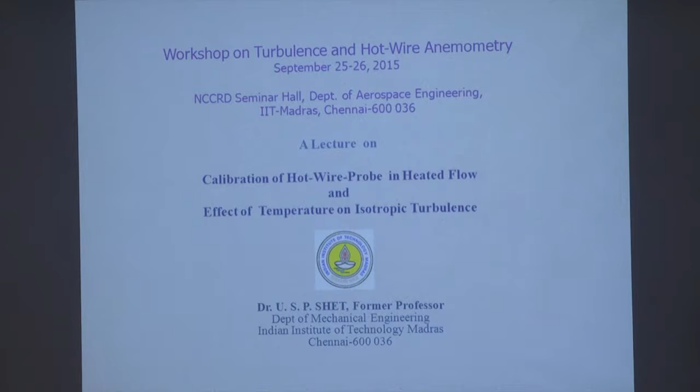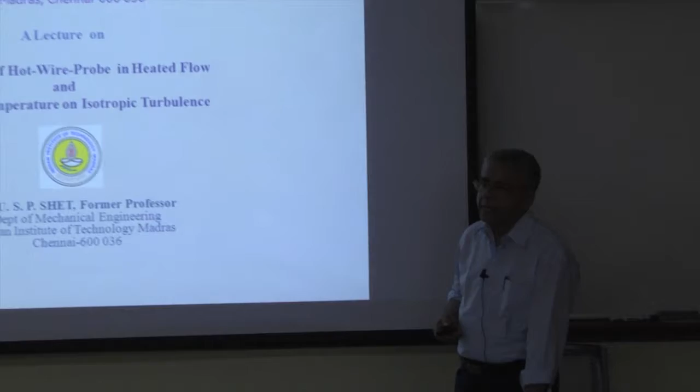I did work on hot wire anemometer towards my PhD work at Salford University, UK. Then on return here, I also guided two PhDs on turbulent combustion, and the research scholars had to do a lot of measurements. So it was with great pleasure that I accepted this invitation, and I'd be happy to share my experience with you on these measurements, and any doubts regarding the construction of the facilities towards the calibration of the hot wire anemometer.

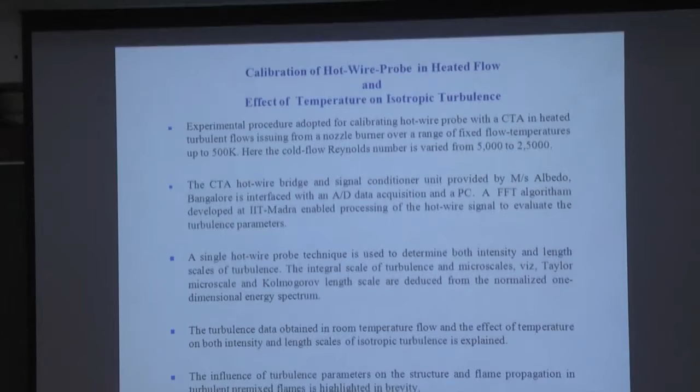Before I go into the topic, I will highlight how I intend covering this talk. First, I will talk about the general setup we used, and the CTA bridge that was constructed here. It was a custom built hot wire bridge with signal conditioner. In those days at IIT, everybody was using the hot wire anemometer. There was such a scarcity, we had to wait sometimes to borrow them from the neighboring lab, so we thought we can try this exercise. At that time, Professor TS had just come from Kanpur IIT, and he had an algorithm on FFT.

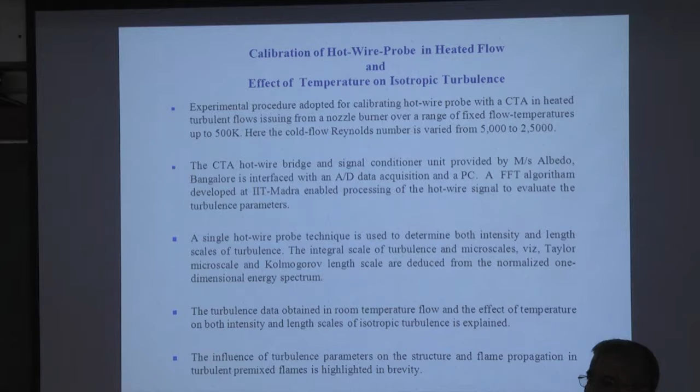You would have heard about that yesterday. He talked about how to handle the time series of the hot wire signal, then digitize that and carry out the statistical analysis - measuring the RMS value of the velocity fluctuations, and converting the time series to the frequency domain, leading to the construction of the spectral density, the energy spectra of these signals. That led me to use that bridge to deduce hot wire measurements and get data on time scales, length scales, and so on.

In fact, we tried to relate the signal - the result obtained from the signal analysis in the time domain, that is autocorrelation - and using Taylor's hypothesis, went from the time scale to the spatial scale, so the length scale could also be deduced from that. Another possibility is directly from the spectrum, since we have the facility to get the spectrum, and from the spectrum this length scale can be deduced.

With that motivation, we were very happy to try building a hot wire bridge as a trial unit, and then we compared the results with the Dantec hot wire anemometer, and the results were excellent. Cost-wise it was very effective - less than a lakh of rupees, whereas the commercial unit would cost about 6 to 8 times higher at that time.

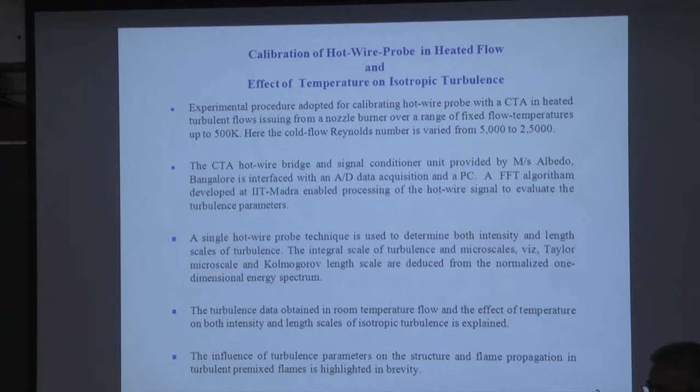So we wanted this turbulence data as a function of flow temperature, hence the interest in making the calibration in heated flow. Of course, it is a very difficult task to achieve steady state conditions and control the flow parameters such that you can vary the Reynolds number and then vary the temperature given the same Reynolds number. That exercise we had to do, and the measured data we obtained, the intensity of turbulence, the length scales of turbulence, and the spectral information as a function of temperature, we analyzed nicely, and that result I will present as the last but one item here.

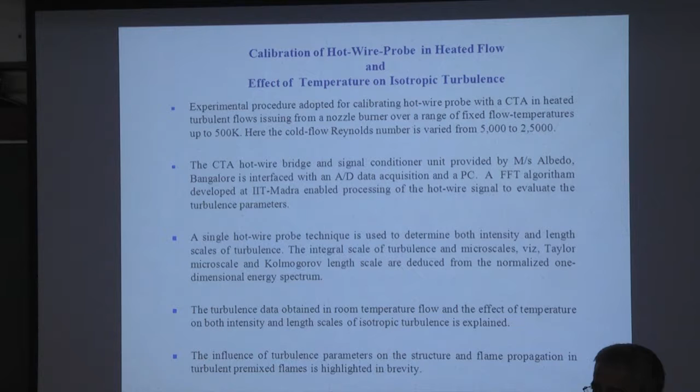Before I begin with these top four topics, I would like to show you some interesting Schlieren pictures of turbulent premixed flames, where you can really see the influence of turbulence on the flame structure. This gives a lot of information, so that our goal to deduce appropriate models for predicting the burning rate, the turbulent burning velocity, is guided by these flame pictures, which in short tell us what turbulence does to the flame, how it changes the structure.

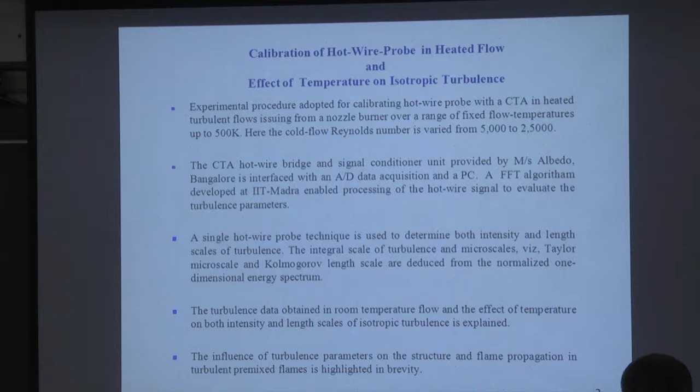So this is not part of the main lecture. In fact, I will just show you the pictures first and quickly move on to the main topic. Am I speaking very fast? It's just an introduction, and if you have any doubt you can stop me and I will explain further.

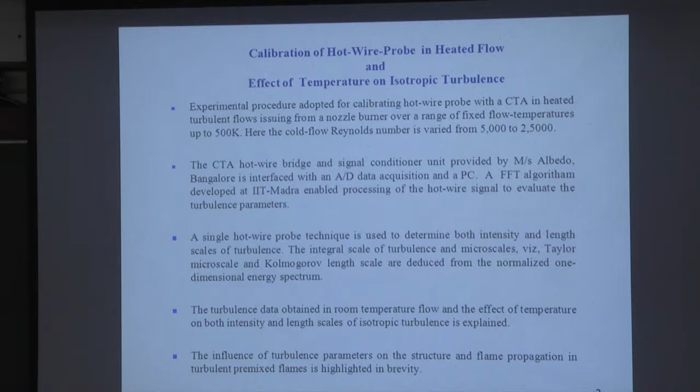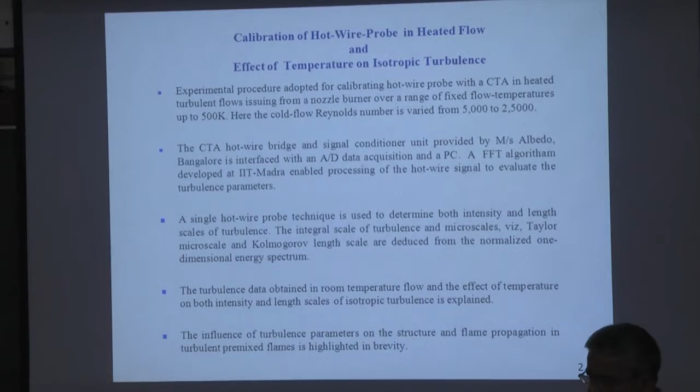With that motivation of having to measure the turbulence parameters accurately, we ventured to build a hotwire anemometer ourselves and obtain the results. This was also part of the PhD work of two scholars. Prior to his work, the other scholar worked with what was then called the DISA anemometer, which later became Dantec. So it went through a lot of changes. The results we obtained were comparable in accuracy to the commercial Dantec equipment available with us at IIT at that time, but everybody was interested in doing such measurements in fluid mechanics, aerospace, aeronautical, mechanical engineering, and so on. So now I will go to those flame pictures.

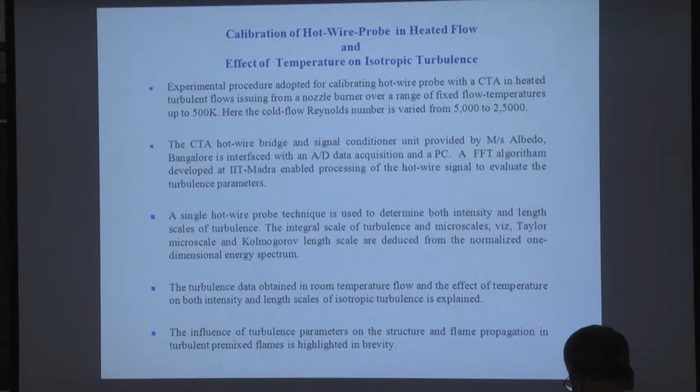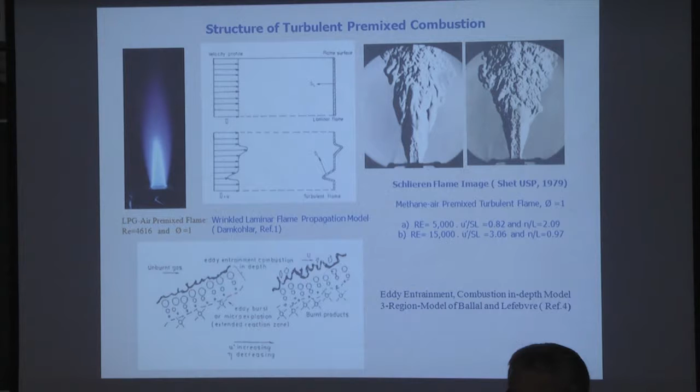This is just the structure of a flame. This is an ordinary turbulent premixed flame—you are very familiar with the Bunsen burner, no? If you try to adjust the flow rate going through the hole, there's a control, a small ring. If you try to close it completely, what happens? You get a diffusion flame, because only the gas jet comes from the bottom, and it simply comes out, no air can enter.

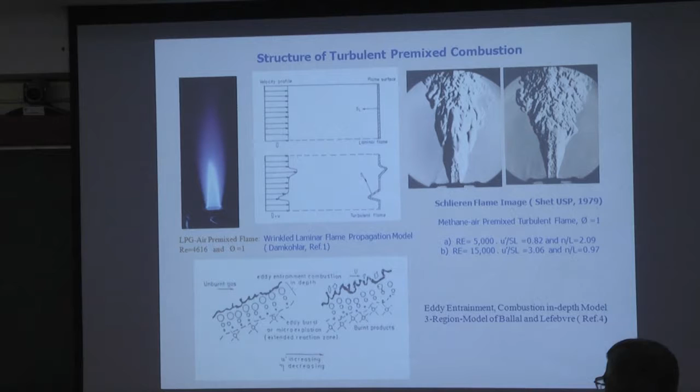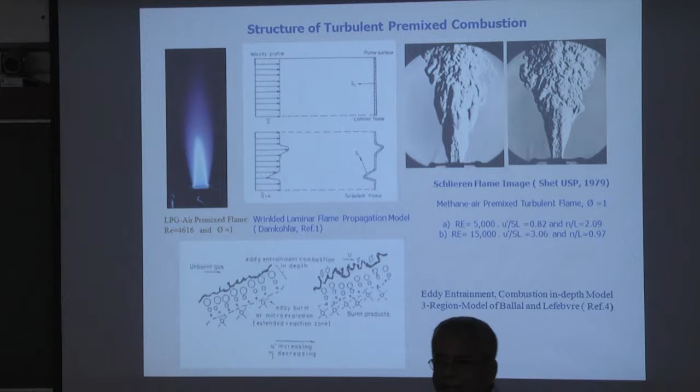As it emerges from the burner mouth, it enters air and you get a so-called diffusion flame. But if you allow air to enter the Bunsen burner by controlling the ring, you get a similar small flame, but this is a laboratory turbulent flame, LPG air flame, Reynolds number 4616, a stoichiometric flame actually. Here you see the so-called turbulent flame brush, which has a certain finite volume. In a laminar flame it is straight, you get a sharp, very flat flame surface. So turbulence does a lot of action on this flame surface. In fact, the flame-flow interaction is so complex, and turbulence does wonders on it.

It increases the burning rate. The flame becomes very compact, it becomes a high intensity flame. What is meant by high intensity flame? Energy released per unit volume. Of course it is a rate of energy release, but if it is done in a smaller volume, it becomes a high intensity flame. So turbulent flames are really more compact, and unlike diffusion flames which are very tall, they also serve other intended needs—they emit radiation, and their heat transfer properties are excellent if you want heat transfer from the flame to the surroundings. But premixed flames won't radiate heat as much; they intensely release heat being very compact, and that has its own application.

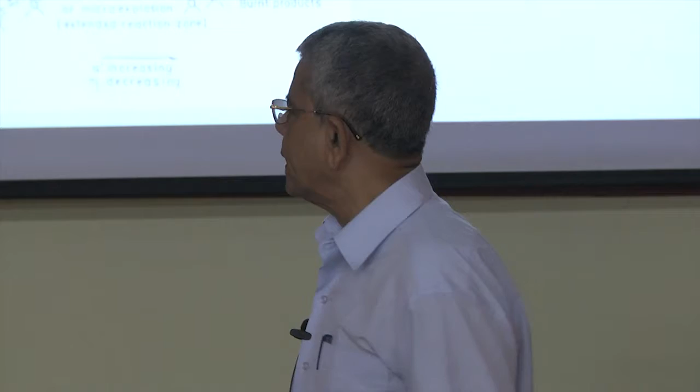So these are technical reasons why people go for premixing. There are dangers too, of course flashback, a lot of things. And if you go to extremely lean mixtures, you tend to save fuel, conservation is there, but it becomes unstable. Since the burning velocity for lean flames is smaller, it leads to instabilities. You would have heard in your aero department a lot of work on combustion instabilities—I think Professor Sujith is doing a lot of work in that direction.

So lean flame has other problems, like this. So now what is the role of this turbulence?

We have to understand this because we are measuring turbulence parameters, intensity of turbulence and length scales. As you know, turbulent flow is very complex in nature. It has U, V, W components, and it becomes isotropic because in each direction the fluctuations have no preference. It's random, yet at the same time it is reproducible.

Intermittency is there, and we have to characterize the flow with appropriate parameters. How to do that? You can give a statistical description, or go to the classical theory of mixing length, or Prandtl's mixing length theory. And after all, what is the mixing length?

Then you think about the eddies. You can say turbulent flow is nothing but a flow of fluctuating eddies of different sizes and different angular velocities. Eddies have a lot of meaning. They can fluctuate, they can spin, and there is vorticity in it. It's a very complicated picture.

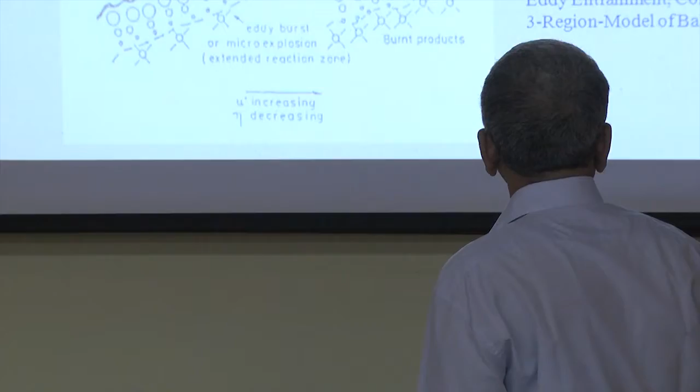See, this is a Schlieren flame image. I did this for my work long time ago. That was the work there. See, this is at 5000 Reynolds number, and this is at 15,000. It's 3 times more flow here.

Then you have this turbulence parameter. I measured the turbulence. Such a structure can be a flame, or it can be other situations like mixing.

At one point mixing takes place locally, and then the mixing intensity decreases as you go away from the source of turbulence, like this. In this case the overall structure is like this, but how will I relate the turbulence effect in this particular case?

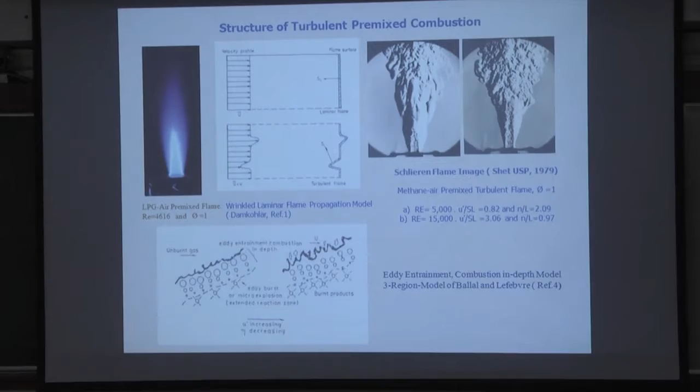So we generate turbulence at the burner mouth here, and then the flame forms this cone here. Fortunately for those who work in this area, the turbulence is preserved in the potential core - from outside, turbulence is not able to come inside, because there is a barrier against that. The reaction zone will not allow outside turbulence to come inside.

Inside, turbulence is there, that causes its action on the flame front. So the flame front gets wrinkled here. Wrinkled means the eddies will come and bombard the flame surface, they get undulations, and it becomes wrinkled.

That is characterized in this research by the parameter intensity of turbulence, u prime, the RMS value of velocity fluctuations. So we go for isotropic turbulence, simple case. I am sure at that plane of the burner mouth, whatever I have generated, I know it is well defined, it is isotropic, and further downstream there may be decay, that is always there.

Then the overall effect of that structure is to wrinkle the flame if turbulence is weak. When you say weak turbulence, I have to compare with something, a reference. The reference itself is that property called the burning velocity, laminar burning velocity.

How many of you are here in aerospace background? Aerospace here? Mechanical, all of you are mechanical, right. So you would learn all these things, burning velocity of premixed system.

Eta by L later on has great significance, the ratio of Kolmogorov scale to the macro scale. It talks about the dissipative nature of the flow. So if the size of the eddies is large in comparison to the thickness of the flame, delta L, it causes undulation on the flame surface. So this is large here.

So this is the story of the turbulence effect on the reaction, explained by several theories which we are not going to cover, like the wrinkled laminar flame theory. They are not of concern for this talk, but I elaborated this to show how important this length scale of turbulence is, which you are measuring, and later the magnitude of these scales has to be compared with the size of the flame front thickness.

So that ratio, 2.09, is very high, so it wrinkles there. The flame front thickness, delta, is very difficult to evaluate. By measurements you have to take a flame picture and define the boundary, one side unburnt, other side burnt. In laminar flames it is very easy, it is very bright and demarcated easily, whereas in diffused combustion it becomes very difficult.

Now, see the other case is very interesting. This is when U prime by SL is large, turbulence becomes stronger, and at the same time eta by delta L becomes less than 1, meaning eddy size is comparable to the flame thickness. That leads to the extended reaction zone.

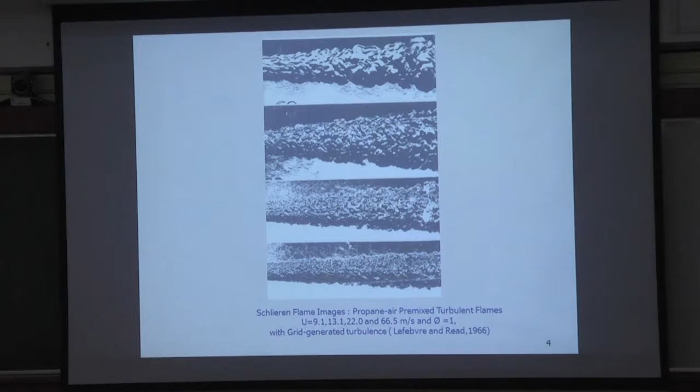So I will just show one quickly. These are all just pictures, they look nice. These are premixed flames of the magnitude occurring similar to those in afterburner systems. Afterburner - you've heard of gas turbine combustion afterburners.

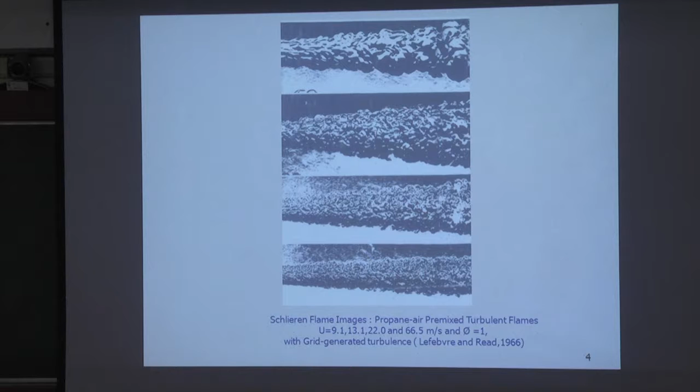In afterburner systems you add more fuel because a lot of oxygen is available there. So you can put some fuel, burn it, and get extra thrust due to that afterburning. In afterburning a similar type of configuration takes place, so the spreading of the flame angle is very critical.

Turbulence dictates these angles actually. They cannot come and touch the combustor wall - finished. Locally if it is exposed and touches the wall, a hot spot will take place. That's a great risk. So the whole flame should be well within the confined walls. Turbulence is important to know what the spreading angle of these flame systems is.

Depends on - my bias in this talk is on premixed combustion. Similarly you can think of other situations, but the role of turbulence is to be analyzed in any engineering problem. These pictures were done in Cranfield University, UK, at that time, 1966. They are all Schlieren pictures.

See the eddy size, the effect is there - large eddy is doing that, meaning essentially low speed flow, as low as 9.1 meters per second. When it goes to the high speed flow of the order of 66.5 meters per second, stoichiometric flame, you see the eddy structure - they all become small.

There is intensely burning flame, the burning rate is very high, and we want to release a large amount of energy per unit time. For our intended purpose, that fuel energy should come out as thermal energy through the flame process, assisted by other parameters - fuel richness, flow, all that.

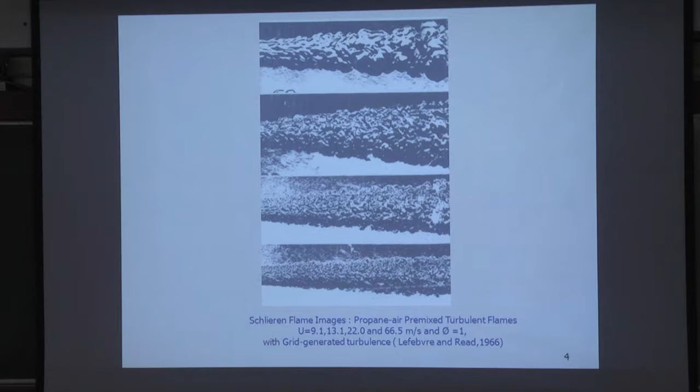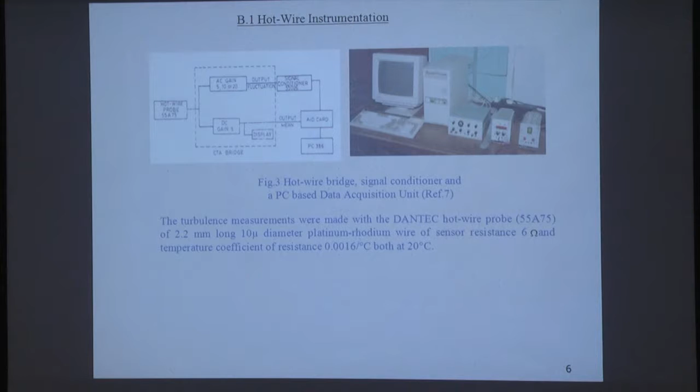Now we come to this. You understand now the importance of turbulence. It might have looked like a story, but the underlying fact is simple: intensity of turbulence, large eddy size, small eddy size, and Kolmogorov scale - they all help us visualize how the process is governed by these values.

Okay, now we come to this. This is the hardware we built, a custom built bridge here. This was the one - hotwire probe, same as the DANTEC probe, was used. That was platinum rhodium wire, written here - 6 ohm wire with that temperature coefficient of resistance. It can sense the hotness of flow up to 800 at maximum limit.

In all hot wire probes, the important thing is the wire is supported by guiding walls, guiding supports, and some high temperature resisting epoxy glue is held there, it is welded, and that whole thing is there. So the limitation is the maximum temperature the probe can support.

In our work here, the scholar wanted to measure the turbulence in our lab as per the facility available. He wanted to go up to 500 Kelvin, that is delta T, temperature difference with respect to ambient, being of the order of 200 degrees centigrade. And this probe matched very well.

You remember when you operate the flow probe, you have to set a ratio called the overheating ratio - the probe's maximum temperature - in order to have high sensitivity and good frequency response. So the higher the temperature of the medium, the probe should support that application, and you have to select the proper probe accordingly. So this probe was used, with the signal CTA bridge - we went for the constant temperature anemometer, which has high frequency response.

That had a facility to control the gain on the RMS value fluctuations, and through a signal conditioner it is sent to an analog to digital card. In those days it was a great fascination to buy them and have it on your PC.

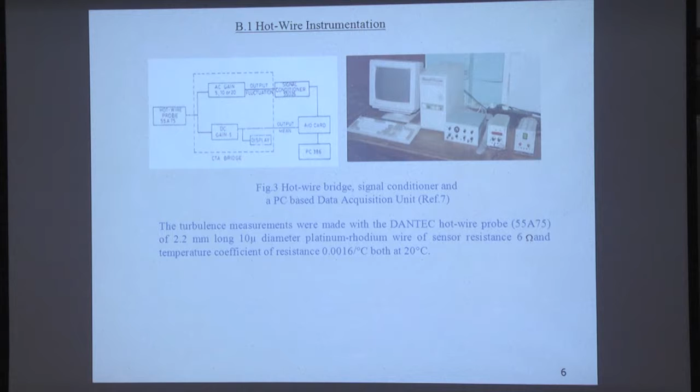This was a simple PC, 386 at that time, and the card was inside this one, and then it could receive the DC component of the signal as well as the AC component, amplified or without amplification, for further processing.

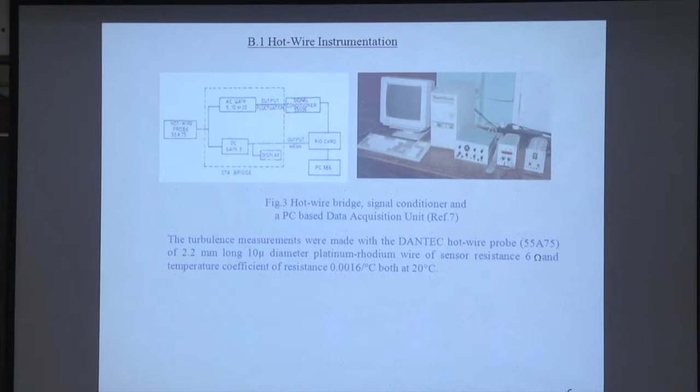Software was written for that effect, and the computer analyzed and stored the hot wire signal. It was later digitized, and in digital form stored as time series. The digital values were stored, and statistical analysis was made for measuring the RMS value of fluctuations, root mean square value of the fluctuation.

That means the amplitude of the signal is squared, averaged, and then the root is taken - root mean square. So the computer could do it.

Now these are all signals coming as electrical signal. We want to measure velocity fluctuation, but to convert electrical to mechanical, it should come - so we need a calibrating factor. This is called hot wire calibration. We need to know that constant, the calibration constant. That's precisely the point where we talk much about hot wire anemometer calibration.

Hot wire is very complicated, though simple in principle, because the output that comes from the bridge, depending on its mode of operation - either CTA constant temperature or constant current anemometer - depends on the property of the probe itself, property of the flow medium, and the geometry of your probe.

King's law, the famous King's law, relates voltage output to velocity, and King's law has three constants in it. One is the no-flow velocity voltage output, the zero velocity voltage output without flow. Another is a constant which accounts for the effect of the property of the medium, the property of the probe itself, and the geometry - that is called that one constant.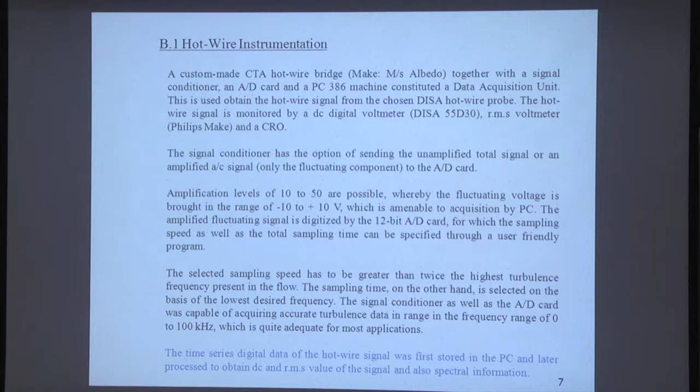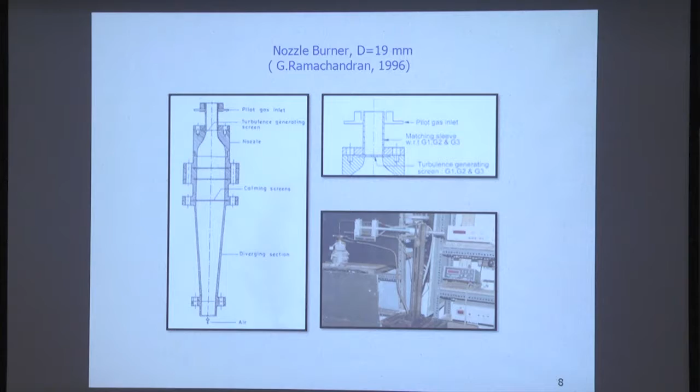There are certain approaches to the design of this analyzing system, the data acquisition system. Before that, the hot wire signal should be able to be handled by your data acquisition system. You should spend a lot of time on these ideas - for instance, the sampling time and the sampling rate are two very important things.

Sampling time and sampling rate - one is to handle the high frequency component, one is to not neglect the low frequency component signals. These two things are very, very important. The overall frequency response of our data acquisition system could go up to 100 kilohertz, but we never wanted that range, because for turbulence, what should be the frequency range to handle a good turbulent signal - that's the question.

We can manage up to, say, 10-20 kilohertz. In fact, they say if you expect turbulence to have a coverage of a certain frequency range, you should give a coverage of at least twice that range to be adequate. So twice the range should be sufficient. For our purpose here, 0 to 100 kilohertz was more than sufficient.

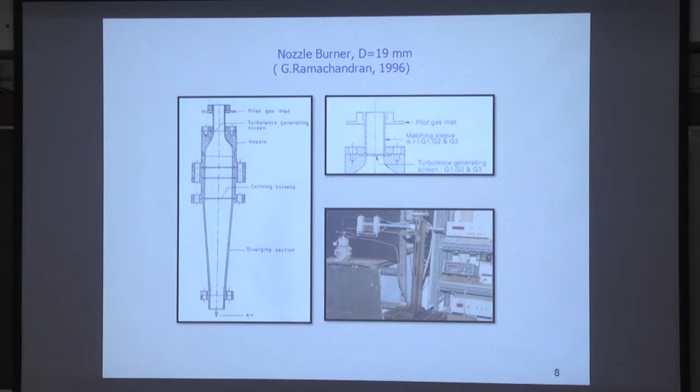So now we come to the hardware part of it. Electronics is over. One way is to do accurate measurements, meaning you should have a large section where you can put the probe comfortably, the size of the probe.

In our work here, this was a laboratory scale measurement, and we had to obtain this flame on top of it. You burn at the mouth and the flame will come there. At that point, we have to get the required level of turbulence so we can at least see something - you can call it weak turbulence or strong turbulence according to our own definition.

So this is the setup, and when you do the calibration, there should not be any turbulent fluctuation initially in the flow. It should be as far as possible zero, a calm flow.

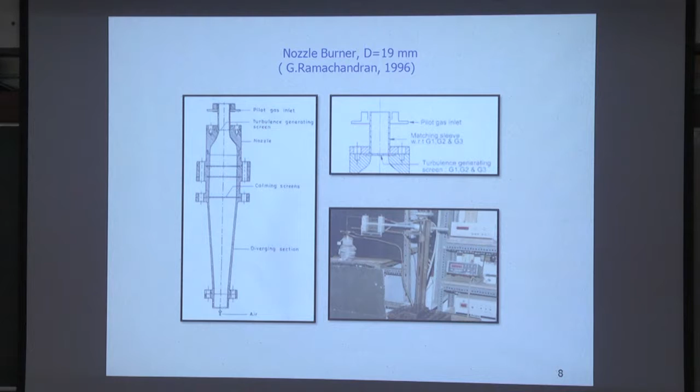But as Reynolds number increases, what happens? There will be instability associated with the laminar sublayer near the wall, which tends to generate instabilities. At least we are fortunate to have a turbulent core. Depending on this, you can suppress those instabilities by taking a large contraction ratio nozzle.

Do you understand what is meant by large contraction? It's the inlet area divided by the outlet area - that's called the contraction ratio. If you give a large contraction ratio, ideally of the order of 25, so if you want a 1 inch diameter at the outlet, the inlet should be 5 inches - 5 square divided by 1 inch square gives a 25:1 ratio, which is very ideal.

But then the burner becomes bigger, and 1 inch itself is big because we want to have the metering facility - you have to meter the flow, meter the fuel.

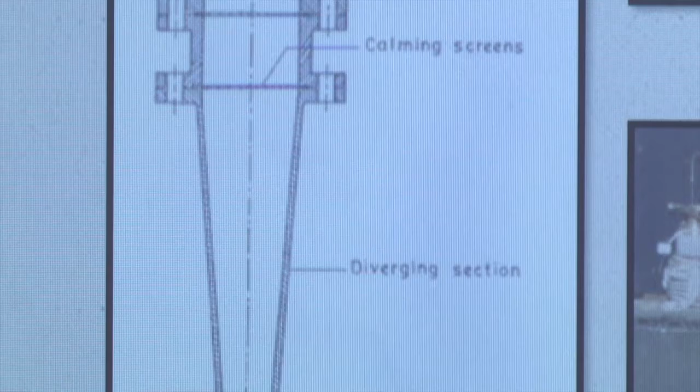How will you do it now? What type of metering do you do? Mass flow - you've got mass flow meters, right? How do you meter the flow rate? Through mechanical measurements - rotameter, for one thing.

Then I'm making this like a classroom - don't mind, this is a seminar, but I'm just probing you.

So you have rotameters, orifice flow meters, Venturi, nozzles. Now mass flow meters are there, very easy to use. The bigger the flow you have to handle, the more you have to go for conventional things like orifice plates, and you have to keep the flow constant.

You should not let it vary with time or decay - you should be able to maintain the flow. That's also another thing - it's everybody's headache, not just the scholar's headache.

The guide will also be very upset if you are not able to do the experiment properly. You won't get results, you'll get some noise, and you'll have to repeat it. So do something properly, get a good result in which you have a lot of confidence.

That means you've controlled the flow, it is steady. But anyway, you are waiting for steady state - so when you make a variation there, you should wait for steady state. So flow metering is there.

So it was like 1 inch - the diameter was 19 point something, that's 3/4 of an inch. We're still in British units for these pipes, they're coming in inches now - that was 3/4 of an inch, 19 millimeters.

So in that, to calibrate, first you design it - we have to have a diffuser section so the velocity reduces, and calming screens are put in with fine meshes. If you put fine meshes, the turbulence level goes down, because eddy sizes are broken into smaller ones, but velocity is not there - so it's calmed down, and then you have a reasonably high contraction ratio.

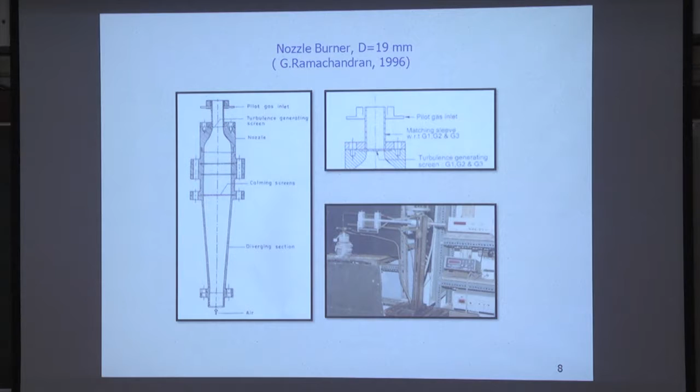It's not very big - it is actually 6.9 to 1. It's not very much, but we cannot help it. Then if you want to generate turbulence, you can put perforated plates there. Meshes or perforated plates are the ideal way to generate turbulence, isotropic turbulence.

The isotropic turbulence is achieved after a certain settling distance. Initially, small jets are created by the pressure drop occurring as the flow passes through the meshes or orifice plates - turbulence is generated and then settles.

There is a lot of reported work on this. I've mentioned it in my notes. We'll give you some correlations to tell you at what distance isotropy settles in. For measuring isotropic turbulence, the settling distance is about 10 mesh lengths, where mesh means the opening or aperture relative to the overall grid. Some specify this distance in terms of mesh length, others in terms of wire diameter - that comes in the next slide. Depending on that, you design or choose the appropriate mesh, or turbulence generating grid, to achieve isotropic turbulence.

In our case, the flame is achieved at the burner mouth. So at the burner mouth you have to put a hot wire probe and a flow sensing device. What is the flow sensing device? Classically, to measure flow you use a pitot tube. But you can't put a big commercial pitot tube bought elsewhere - those have at least 3 or 4 mm diameter with a static hole and a pitot total hole. So in our case we went for a locally made pitot tube.

How do you make the pitot tube? You buy a hypodermic needle, a long one, and bend it nicely to make a pitot tube. That pitot tube had a diameter of 1 millimeter - much smaller than the standard ones. So one pitot tube comes there, your hot wire probe comes there, and for heated flow you have to put a calibrated thermocouple, copper-constantan, which we used. This is the arrangement, and this is the traversing apparatus - looks very old fashioned.

One traversing apparatus holds the two with some small gap between them. If they are brought too close, what happens? There will be an interference effect, and the flow sensor should sense the true flow. In our case, thermocouple, pitot tube and hot wire - three sensors are there. So the best way of aligning them is to have them equidistant from the axis.

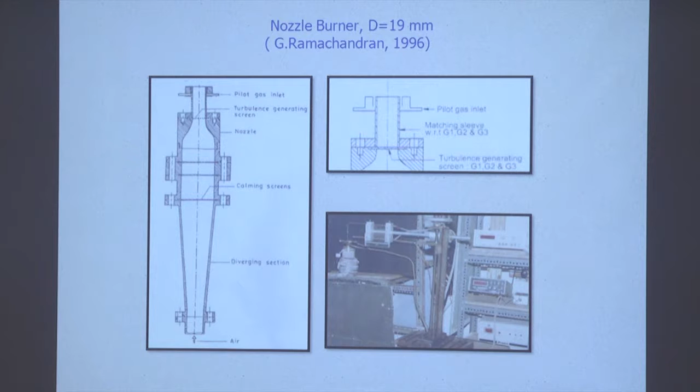What is the philosophy behind that? Three things are there - you can't arbitrarily place them just thinking there's a potential core. Potential core is there, but how far does it extend? About 5 diameters. So the potential core is there, but interference of one probe on the other disturbs the flow - each probe has its own wake, and that should not happen. So at the same plane you should have the three sensors, and the best way is to align them equidistant from the axis.

What is the idea behind that? Equidistant means - at least I'm thinking - you divide the entire surface into annular rings. So if there is truly a potential core with properties being the same, the interference of one probe on the other is eliminated because they are sufficiently apart. You have to confirm all this, meaning how accurately you are measuring. Later we need that turbulence data to compare to something else, apart from the calibration problem, so equidistance is a good idea.

There are other considerations for a good experimentalist. The probe can be put horizontal, perpendicular to the axis. The axis of the probe can be perpendicular to the burner axis so it senses a cross flow. The hot wire should experience cross flow - the main flow should act like a cross flow for that wire. Or you can have a bent L-shaped probe brought from the top. All this, your scholar has to think about, to get the most accurate results.

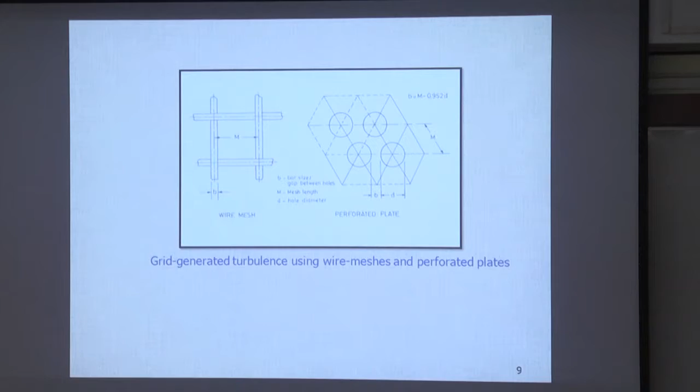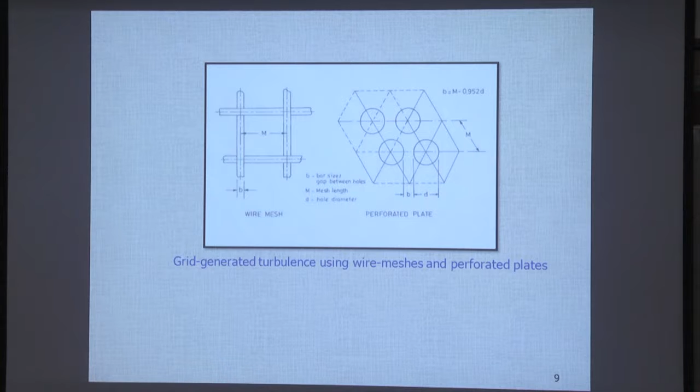Now we go to the geometry of the grids. You can use wire meshes, defined by M as the aperture opening and B as the bar size, or a perforated disc with a hole diameter and distance between holes - in this case hexagonal perforated plate with hexagonal holes, that's B. The turbulence generated depends critically on the bar size B or wire diameter, because that creates the wake. As flow passes through, it creates a wake behind the bar or wire, and in that wake, vortices are created.

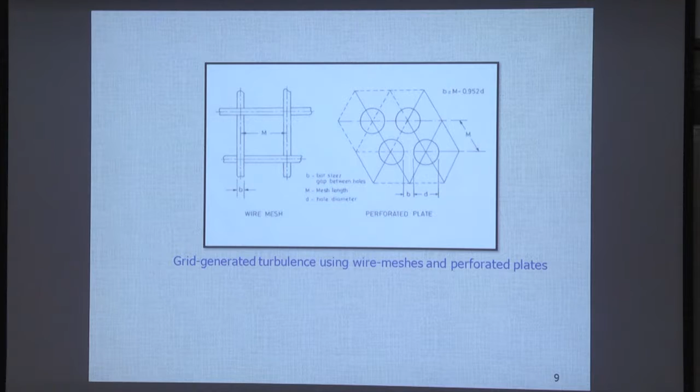You think about flow past a bluff body, you have vortices there, and sometimes the vortices are good for us because they give us what is called the recirculation zone. In the recirculation zone there are regions where velocities are very low, and there we can put our flame to stay stably, keep it residing in the low velocity region. That is called flame stabilization. I am telling you the whole idea of this combustion technology in a very layman's language so you can read and understand it thoroughly.

So here you have this D. This is the perforated plate. We used perforated plates in our case, and this was the sleeve. We extended the burner nozzle mouth by the sleeve, and all the measurements were made here at the mouth of the sleeve, where isotropic turbulence was made available at that section.

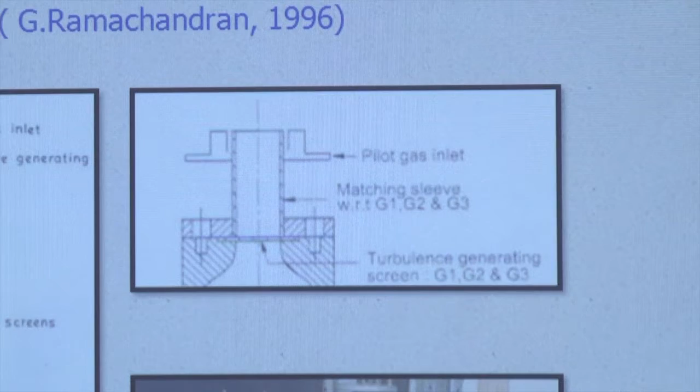The sleeve length depends on the grid. You can have a coarser grid or finer grid. Coarser grid means the wire diameter or gap bar size, as we call it, should be bigger, larger. So coarser turbulence means you will give higher turbulence intensities.

Again in the measurement of turbulence, there are theories that tell you hot wire anemometer measurements will give an accurate error of 1 to 2% if you limit your turbulence level below 14%. If you go beyond 14%, there will be error, because there are other contributions coming from other components, which requires error analysis. So for these cases our limit is 14%.

You have to read all that before you design. In this case our turbulence level maximum was about 12%. We never went beyond that. So we convinced ourselves we are truly handling isotropic turbulence.

This was the thing, so we had to read a lot of literature. There is excellent literature available, done by people like Geoffrey Taylor on the Microscale, and Townsend. A lot of people have done work, all published in Royal Society Proceedings Series A. So turbulence is excellently covered by those people, and it's available in the literature.

Okay, now this is done. Now the next part of the calibration is time. I think I'm telling a lot of stories, I will go quickly. I think I've taken too much time, but let's pass through this quickly.

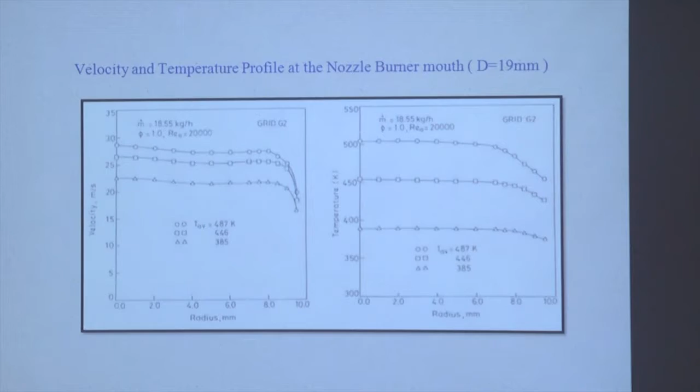So this is the profile of velocity and temperature for keeping the mass flow rate, m dot, constant. You see fairly, in millimeter radius, it is flat, because we are more or less in the potential core. The potential core extends up to 8 millimeters, so 8 into 2 is 16, giving a 19 mm diameter. This distance of 16 millimeters is quite good for us.

Then this is a boundary layer here, the boundary layer effect of the wall. So we have to confirm that your probe is truly in the potential core.

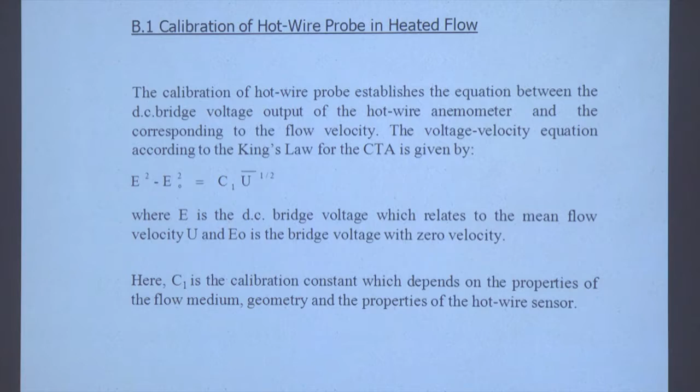That was another justification. And then the calibration law, King's law. The difficulty here is estimating E0 and C1, and the exponent half is never achieved exactly—you get something nearer to half, like 0.45 or so, if you go for this 3-constant form. But it has been improved by using an extended power law, taking A, B, C as coefficients, with one more term added.

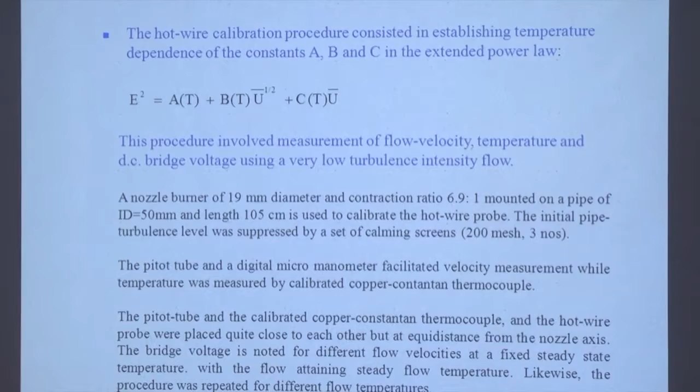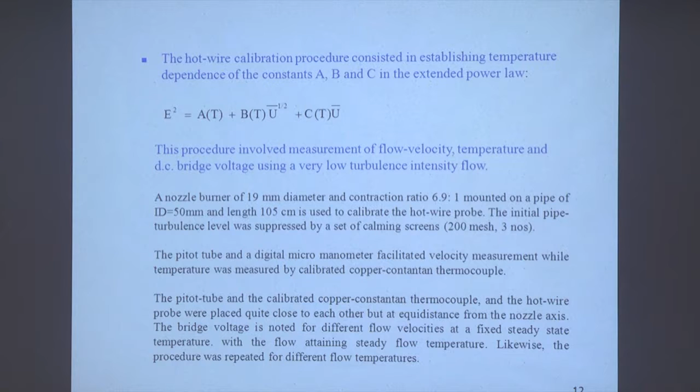By calibration we mean we have to establish the relation between the bridge voltage E and the velocity, and the value of the coefficients should be known. In our case, one more complication is the flow temperature. So in our calibration approach, we wanted to establish or know the relation of temperature dependency of these A, B, C coefficients with the flow temperature. That was our main philosophy.

So the more flow you give, more mass flow rate you give, the velocity will increase, bridge voltage also will increase, because of the more cooling.

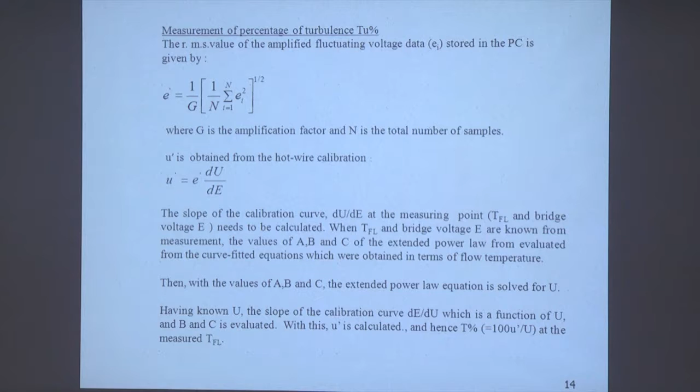So before doing that, you have to solve this equation. In calibration, you have full data as a function of velocity, showing how the velocity increases, your voltage will increase. But with respect to temperature, what is the situation?

So for the given mass flow rate, if the temperature is increased, the bridge voltage will decrease.

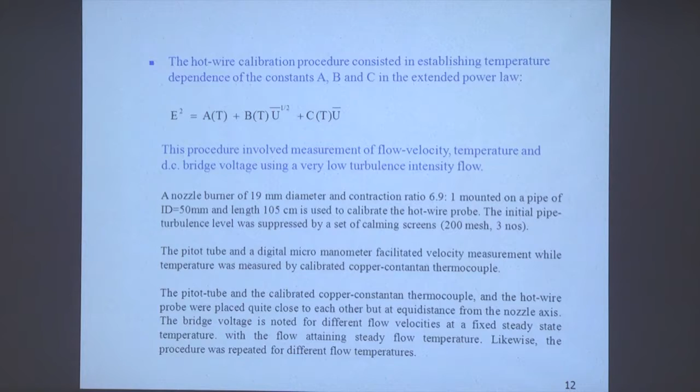So having got this, how will you actually get the information of flow velocity when you put the probe and report the value of the bridge voltage and the temperature you report, right?

So in the previous graph, you have established the temperature dependency of the constants A, B, C. For each curve, you have A1, A2, A3, A4, A5, up to A6 — 6 values — and you have to establish the temperature dependency of each.

So having located the point here, you first calculate the bridge voltage corresponding to that. With that bridge voltage, you go to the extended power law equation and solve it for velocity. For the known temperature, you evaluate A, B, C.

With that you have the extended law equation, and in that equation you have to solve for velocity. Solving it becomes a quadratic equation, because your u-half term is there.

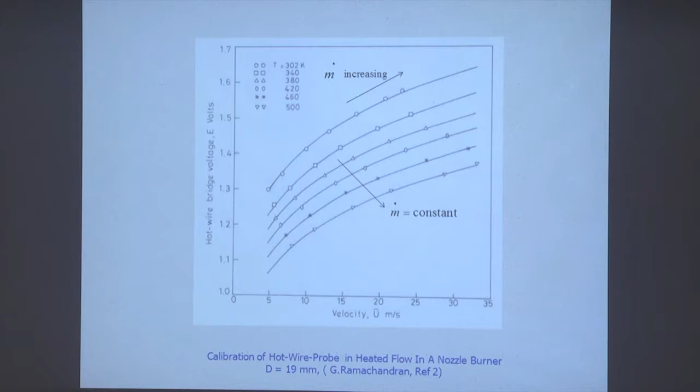There are 2 things there, twice you have to handle the extended power law. One, to determine the velocity in terms of A, B, C, which are fitted with the expressions to know the temperature dependency, and the expression our scholar used was a simple power expression, y equal to A into x raised to power n. So he had the coefficients A and n there for these constants in the extended power law. For all the thing he used the same expression here.

You can have a linear fit, you can do anything, but he tried that one. Looking at the correlation coefficient, he was happy with that. Okay, so I think I will move on to the next one. Now, it is very easy.

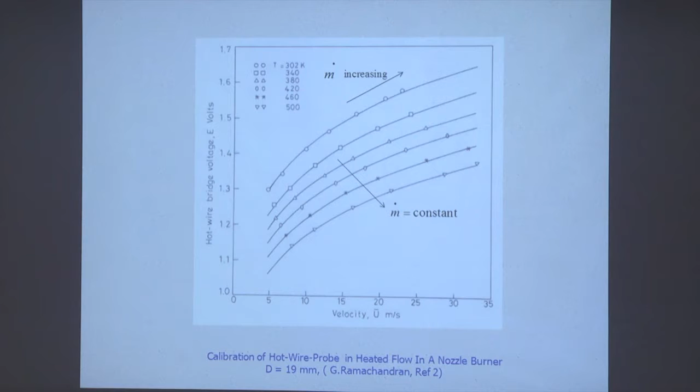The length scale deductions we have talked a lot about. We measure this, first thing is the lateral integral scale, which is very important for us. There are two scales, isotropic turbulence tells us this is isotropic turbulence. The longitudinal scale is twice the transverse scale. In all the transport phenomena, you are looking at the diffusive action perpendicular to the direction of flow, something going transversely. That is very, very important.

So transverse macro scale is governed by this equation here, isotropic relation. Similarly, micro scale, this is the longitudinal, and root 2 lambda will give you the lateral here. So these relations you can use according to your literature, what they have used also you can follow that. Most of the cases, any processes going with the gradients, driven by the gradients, one would go in the transverse direction like this.

Then you got this Taylor microscale deduced from the energy spectrum. Energy spectrum you have to build from FFT, you are moving from time series to the frequency domain, and in the frequency domain you get the kinetic energy held between a given band of frequency delta n. You know what kinetic energy is held in that, that is the velocity square bar. Whole thing normalized with the square of the RMS value will give you the ratio.

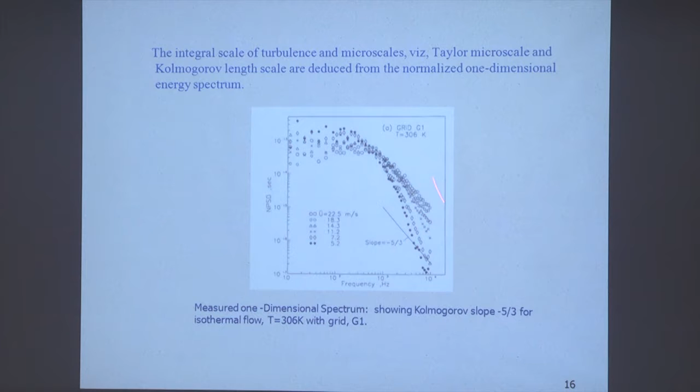That is, the slope is minus 5 by 3. That slope also falls in line with this energy change here, so this line you have to draw and you can make it coincide. That will be shown next - and this is another picture, I don't want to talk much about it.

With time series, instead of going to frequency domain, you can come to time series and maintain an autocorrelation with respect to time. We talked about that yesterday. If you have that autocorrelation, you can calculate the temporal scales - temporal micro scale, temporal macro scale.

You can talk in the same way as the correlation functions given on the spatial coordinate. If you read the turbulent literature, you will see all this - one is temporal correlation, one is spatial correlation. In spatial correlation there are two: the G function and F function. G defines lateral and F defines longitudinal - F for longitudinal, G for transverse.

Similarly, you can calculate the eddy sizes if you like from spatial correlation coefficients, G or F, or from the temporal autocorrelation functions to give the temporal scales. So these are all statistical methods of deducing the length scales.

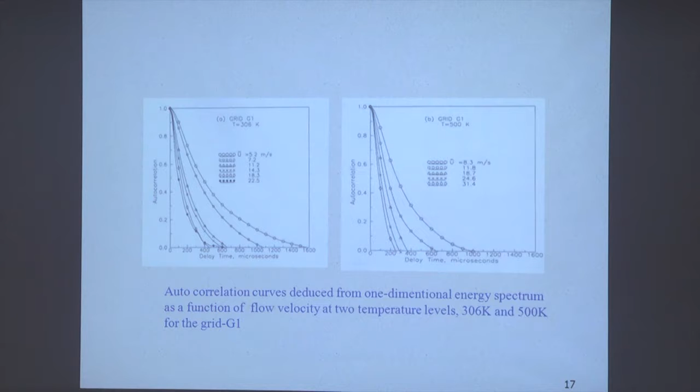And with that, we've come to a very quick session on defining length scales deduced from the spectrum. Autocorrelation is also a choice, if you like you can do it. Now we will go quickly to the results here.

For the 3 grids we have analyzed here - G1, G2, G3 - you see with increase in Reynolds number, the level of turbulence remains almost constant. That is a very wonderful thing. For one grid it is 13%, this is again 8 to 12 - it remains fairly constant at room temperature.

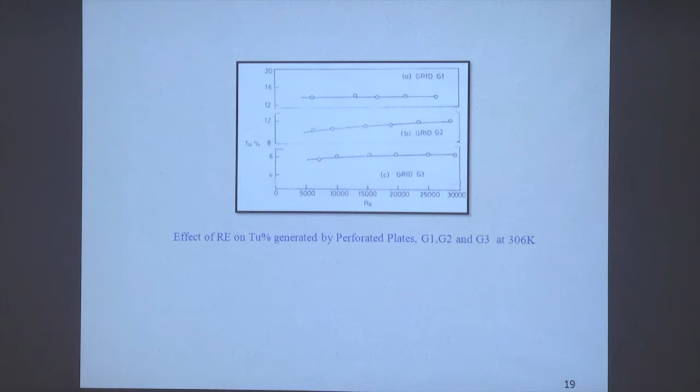Now the length scales, almost Lx, that is the longitudinal length scale, are all given in the notes. My notes contain some of these ideas - I've given in a very simple fashion some logic on viscosity effects, eddy breakup, how the sizes change. You can read it comfortably.

I think I've defined the dimensions, I should give it to you. And then the Kolmogorov scale decreases with increase in Reynolds number. Can you say why? Because your eddy breakup process, which is dictated by U prime, will give rise to smaller sizes - the Kolmogorov scale decreases with increase in this.

And similarly, coarser the grid, finer will be the Kolmogorov scale. It's logically correct - coarser means U prime is higher. U prime higher means eddy breakup is faster. There is more of this energy going from larger to smaller and smaller scales. Then the Kolmogorov scale decreases here.

Now temperature effects - these are very simple to explain, I've given them in the notes. With a given constant mass flow rate, if the temperature is increased, your velocity will increase, because from continuity m dot equals rho A V - density decreases, therefore velocity will increase. But when velocity increases, u prime will not increase in the same proportion.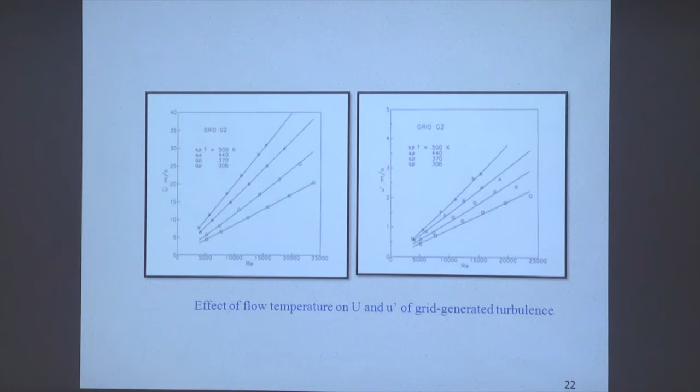U prime is dictated by, along with other effects, like viscosity. So though it increases with increase in u bar, mean velocity, because of the viscosity effect it tends to increase at a smaller rate. Therefore u prime by u decreases. So the effect of temperature on relative intensity is to decrease it. This graph shows that: this level here is at room temperature, this is at 500. So the relative intensity decreases, but u prime, velocity, increases, though they do not scale together. The increase in u prime does not scale the same way as the increase in u due to increase in mass flow rate, because there is a temperature effect opposing it, via the effect of viscosity affecting the rise of the u prime value.

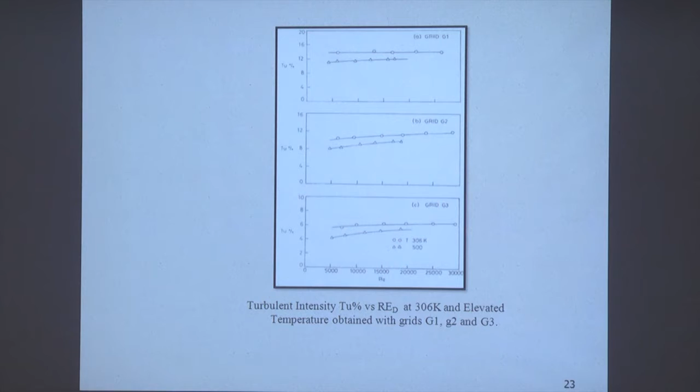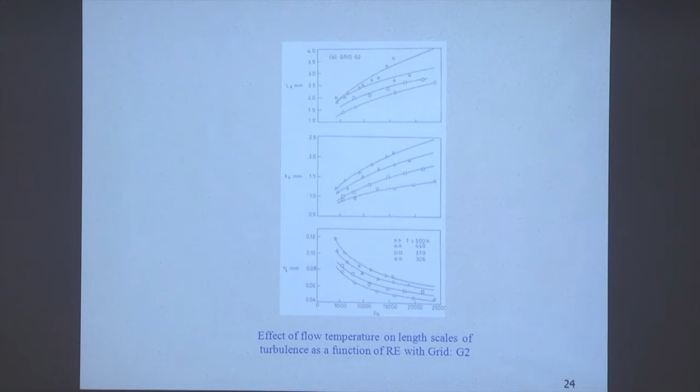Now, temperature effects here: with increase in temperature, this graph is very important. This is 500 here, and 300 is the Kolmogorov scale. Now, why does Kolmogorov scale increase due to rise in temperature, for the given Reynolds number? It is again an attenuating effect of viscosity on the eddies. These are eddy breakup processes, and viscosity opposes it. So the length scale, the Kolmogorov scale, cannot decrease to smaller levels.

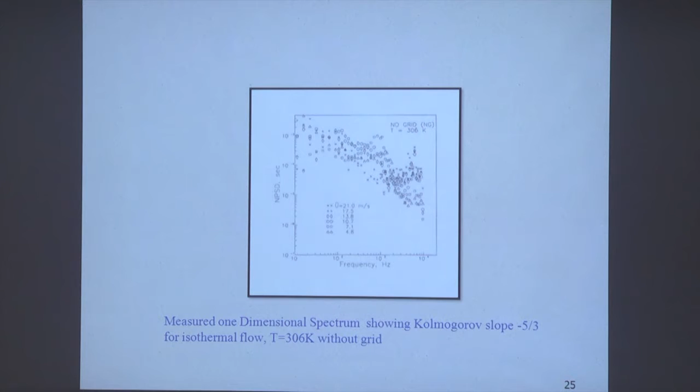The same reasoning applies to other things, I've given simple reasons you can follow. This is for the general case without a grid, which we had talked about as isotropic. Without a grid, we find the orderliness of the spectrum is not good. There is no isotropy there actually, and that is why it gives such a mix-up.

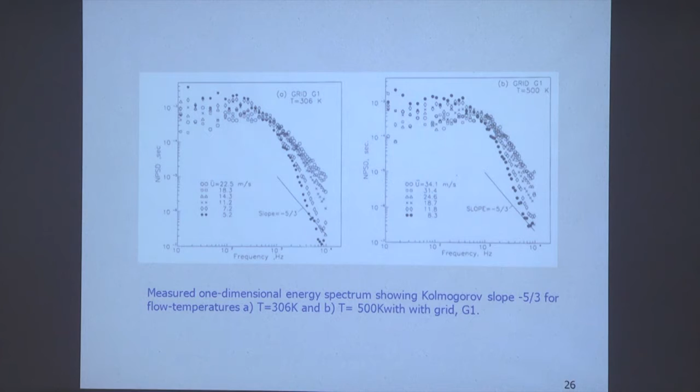Now, the same Kolmogorov scale slope, shown here with respect to temperature. There is a small effect of temperature, which we can show. We've drawn this along with what is called the Liepmann spectrum, which is the theoretical prediction. The agreement is very good, but you see a small effect of temperature here. Everything coincides well with the Liepmann spectrum, but here the deviation is more.

This came up in the classical theory of isotropic turbulence. If you read it, it's not at all difficult. In the beginning it may look a little tougher, but once you become familiar with the topic, the energy sharing from larger to smaller eddies, how they fluctuate, and the shape of the spectrum, you'll be comfortable managing turbulence. Don't be afraid of it.

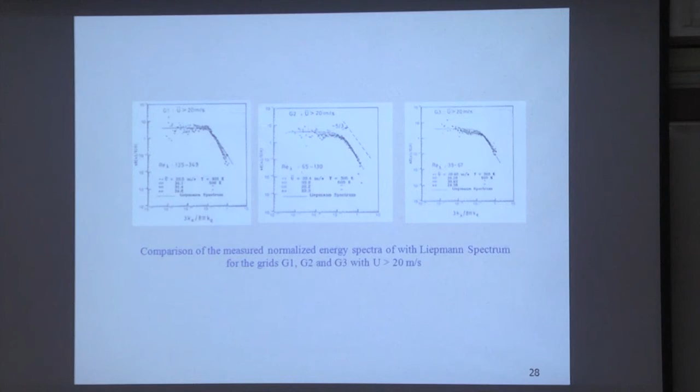Now, the same thing: we show how the correlation becomes better. The transfer of energy, as I told you, makes the Kolmogorov eddies, the highest dissipative eddies, not become smaller but tend to become lazier because they become bigger. They lose their mixing abilities. They still do their best, but they become slightly heavier, slightly lazier.

When I consider grids 2 and 3, which are finer grids compared to G1, the agreement with the Liepmann spectrum was better. You see here for G2 and G3 it's better, the line follows nicely for velocity greater than 20 meters per second. The best agreement is there for the relatively less coarse grid. For the coarsest grid, the deviation is more because the Kolmogorov scale becomes larger, tends to become larger.

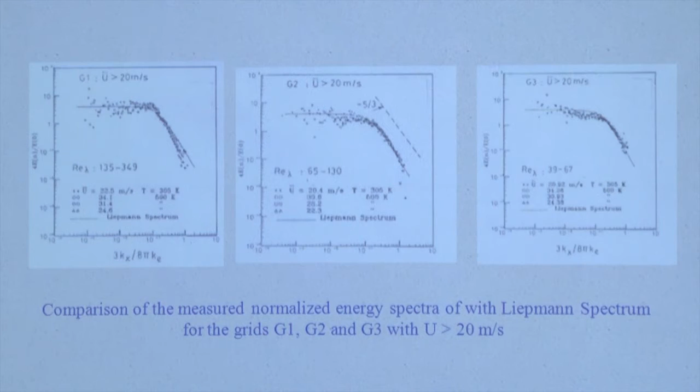They try to hold more energy and they don't get smaller and smaller, driven by the eddy breakup process dictated by the Taylor microscale. And the last very revealing information is this, the modeling. What are we talking about, small scale and large scale here?

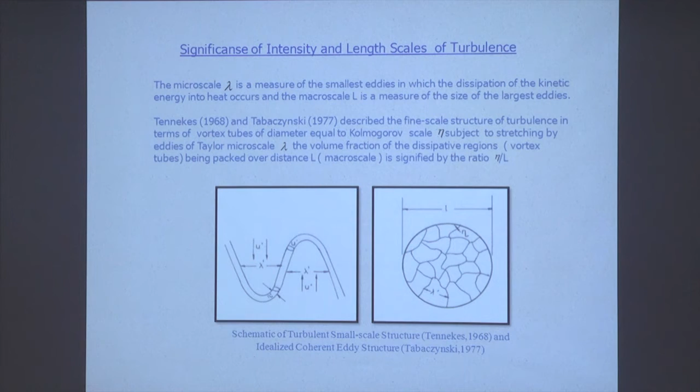The small scale, Kolmogorov dissipative scales, the latest picture is given by Tennekes. He says they are extended in the form of tubes. The diameter of this is called vortex tubes. The small eddies spin there, residing in the form of a tube like this. They are stretched over the space distance called lambda, the Taylor microscale.

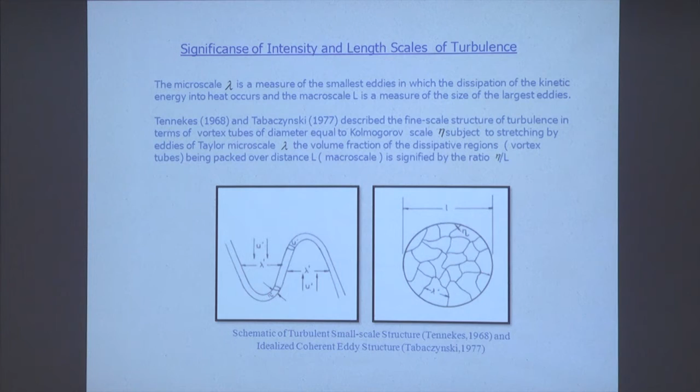Such a bundle of these tubes are held in the framework of the larger eddies. It's like a football, the larger eddy. Inside you have smaller eddies, and it makes a coherent structure we call fine scale turbulence. People talk of fine scale turbulence for a worst situation, high turbulence, because eddies become smaller and smaller and there is more dissipation and more mixing. So they call it fine scale turbulence, dictated by the size of the Kolmogorov scale, that is eta.

So this picture reveals something very interesting: eta by L gets related to REL, the turbulence Reynolds number. If you read the literature by Tennekes and the earlier version, you get all this, and it's very useful, because I told you the story about IC engines. Piston speed and diameter will give you REL, U prime into L, diameter means L. REL is known to you, and L is known to you. So eta by L directly tells you the story of dissipative scales in engine cylinders.

Then, for isotropic turbulence, eta by L scales as 1.342 into REL raised to power minus 3 by 4. That constant comes out from measurements. Why is it minus 3 by 4? That's dictated by theory. So we do experiments carefully, do the curve fit, get the constant, and other engine developers use that constant and do simulations to improve their engine.

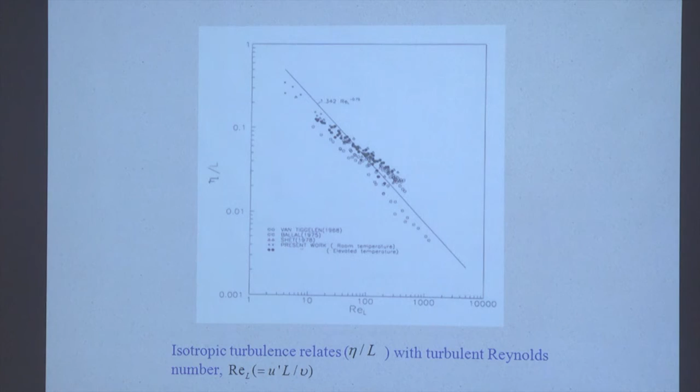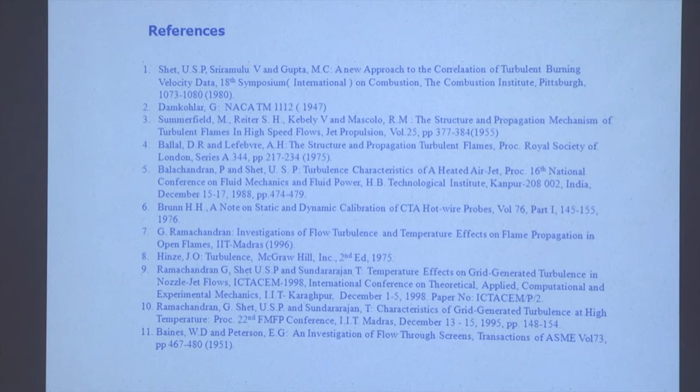Okay, that is the story of turbulence, and I think I'll end here. I am late by 15 minutes, we started late by 15 minutes, and I've taken 10 minutes more. You got the idea now? I have driven you through the turbulence course, turbulence concepts, maybe in a crude way, but it could be the beginning, and you can take it to more reading. I will give you the best references. If you want, you can email me or something. So any doubts? I can answer now.

This is a very difficult subject, but it can be made to look simpler by presenting the right results correctly, though you have to understand it better. That will take some time, but there's no difficulty. The model is very simple. Eta by L is a very nice concept, called the fraction of the volume held by these eddies. Earlier they thought the stretching takes place in a sheet of dimension L. The sheet of dimension L into thickness has a volume given by length into thickness, L square eta. Divide that by the volume L cube, so eta L square by L cube, that is eta by L, called the volume fraction of these dissipative eddies held by the coherent structure eddy.

Because first the eddy gets produced. When you pass the flow through a perforated disc, the flow is broken into smaller jets. Large eddies are generated. They don't keep quiet because of the fluctuations. The eddies are broken by eddy breaker processes, giving rise to smaller ones. And how much volume of the smaller ones depends on the agitation, that is the Reynolds number, right? Some nice models are there with the scaling, and you get that idea.